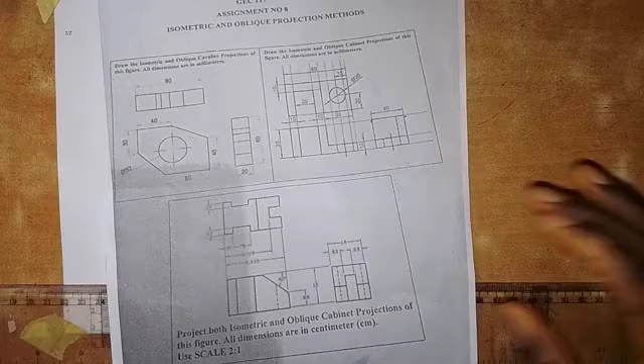Now here we want to work on this particular drawing, and we have to produce its isometric view. As I've said, we have worked on this. We want to produce the isometric view of this, and let's see how we are going to do this.

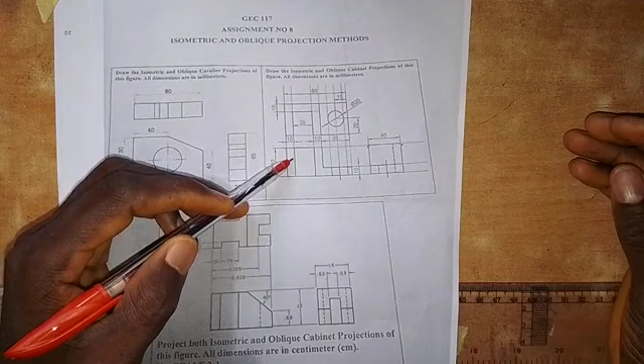So first of all, let's talk about how the views are placed. So this is the front elevation, this is the plan, and this is the end elevation. So it means the views are given in third angle projection. And let's talk about the dimensions.

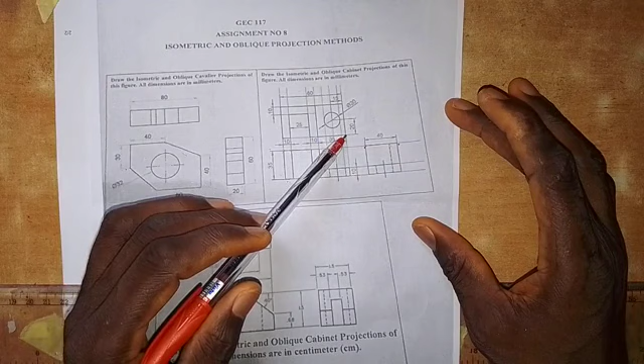So the distance from here to here, that's the height of the front elevation, is 35, and then this is 10 from here to here as we are given in the plan. So from here to here is 10, distance from here to here is 35, and then the thickness from here to here is 10, and then we also have that the distance from this point to the center of the circle is 20. Then distance from here to the center of the circle is 15.

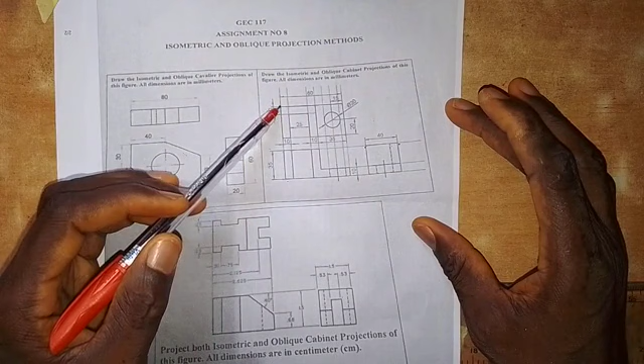The diameter of the circle is 20, and then total length of the plan is 80 millimeters. Thickness from here to here is 10, and then distance from here to here is 25, and the width of the front elevation is 40 millimeters as given in the end elevation here. So we are going to work on this and get the isometric view of this object drawn.

So the first thing that we are going to do here is to draw a horizontal line. So we draw a horizontal line like this, and then we take our 30-degree set square. So we draw a line in this direction like this, and then we turn like this. So we draw a line in this direction.

So at this point, I'm going to draw a short vertical line. Yes, a short vertical line at this point. So I will take a measurement of 10 millimeters. So just follow me the way I'm going to bring out the isometric view. So I will draw this line in this direction. Okay, then I'm going to draw this line in this direction like this.

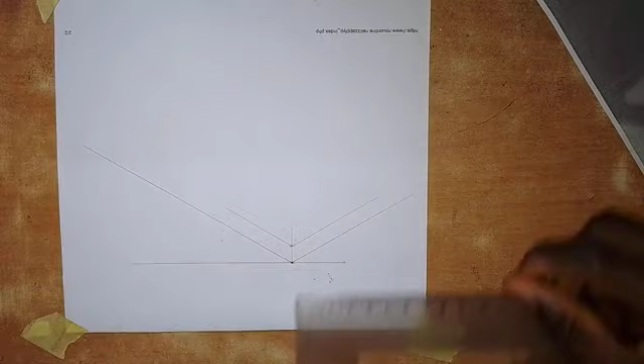Okay, so for the width, I will take 40 millimeters as we are given the dimension of the width in the end elevation. I will take 40 millimeters to this side. So at this point, I will draw a vertical line like this, and then coming here also, I will draw a line from here, backward. Okay, so I'll draw a line from here so it goes to the end.

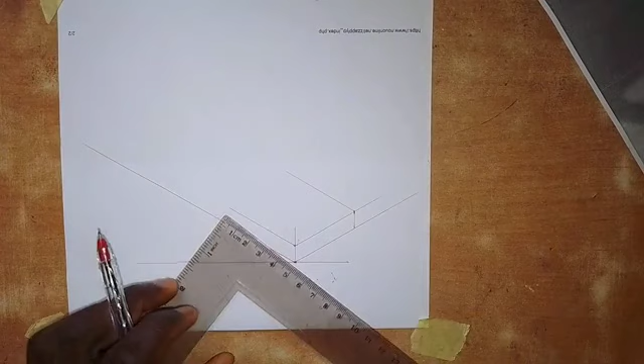So here on this part, I will take 35 millimeters. So this is 35 millimeters. So I will transfer this line to the other side here like this. Okay, so at this point, I will erect a vertical line. Okay, so at this point also I will erect a vertical line. So I want this vertical line to come down to this point.

Okay, so here I'm going to take 35 millimeters, which is the height of the front elevation. 35 millimeters from here up. So this is 35 millimeters here. So I'm going to transfer this point to the other side on the other line. So it goes like this. Okay, so from this point, I'm going to draw a line in this direction.

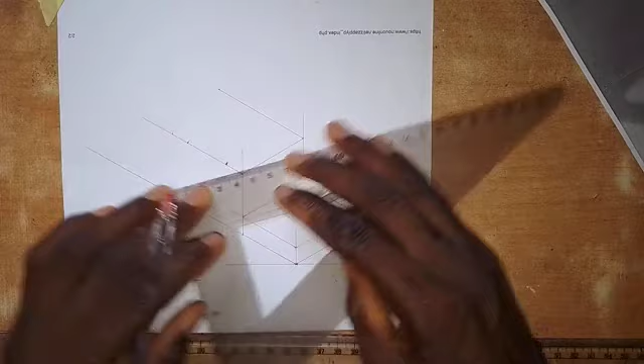So coming to this point, I will draw a line in this direction, and then I'm going to take a measurement of 10 millimeters. So from here to this point, this is 10. Then I will take 25 from here. So this is 25, and then I will take 10 from here to here. So then here on this part, I will take 10 millimeters. So this is 10 millimeters.

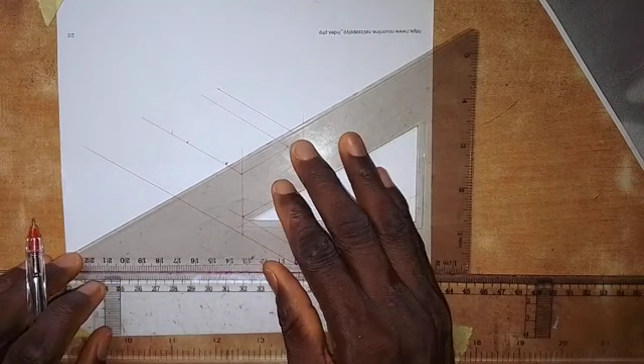So I'm going to draw this line. So I draw a line from here, and it goes backward like this. Okay, then from this point here, I will draw a line to meet this line. So also at this point, I will draw a line to meet this line. Then at this point, I will draw a line so it goes and meets this.

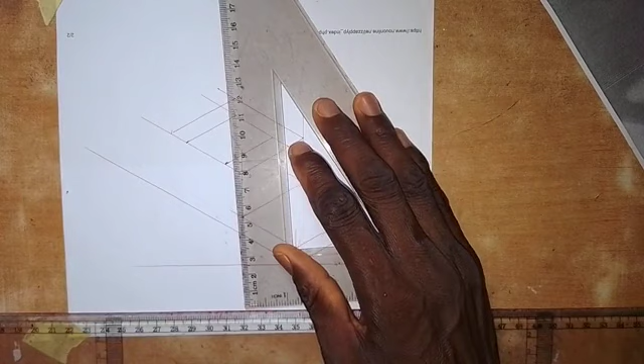So then at this point, I'm going to draw a vertical line. So here I will draw a vertical line down.

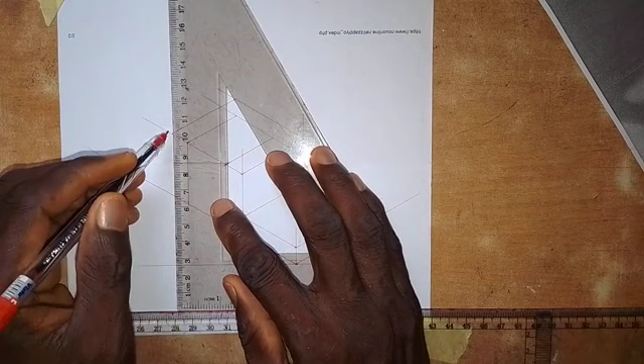So here I will draw a vertical line down here. So here also I will draw a vertical line down. So at this point also I will draw a vertical line down like this. So coming to this point here, I need to draw a vertical line. Okay, so I will draw a vertical line here, and then at this point here, I'm going to draw a line in this direction.

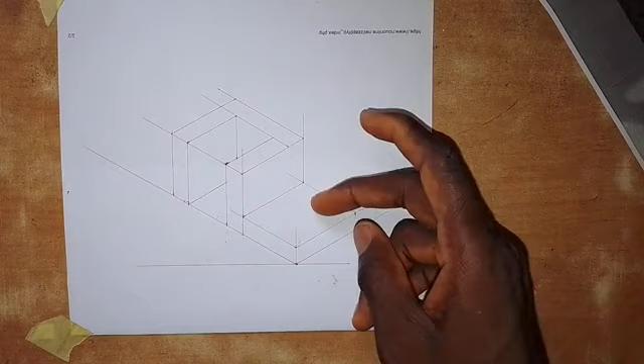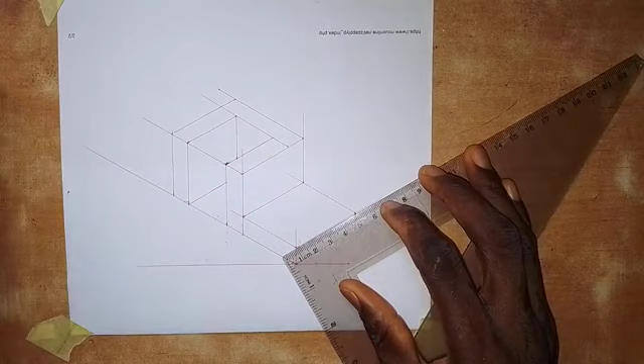So apart from the hole that we have here, the work is already done. So let's produce the hole before I bring out the thickness. We only need to put the hole. Every other thing that we need is already there. So for the hole, it is placed in the middle here. So I need to take a measurement of 20 millimeters here, and I need to take 15 millimeters, so this is 15. That's to get the center of the hole.

So I will draw this line, a center line in this direction, and then here I will draw a line as a center line in this direction. Alright, so the diameter of the circle is 20, which means I need to take 10 millimeters from this point. So 10 millimeters here. So here I take 10 millimeters. And then coming here, I take 10 millimeters to this side from the center and 10 millimeters to this side.

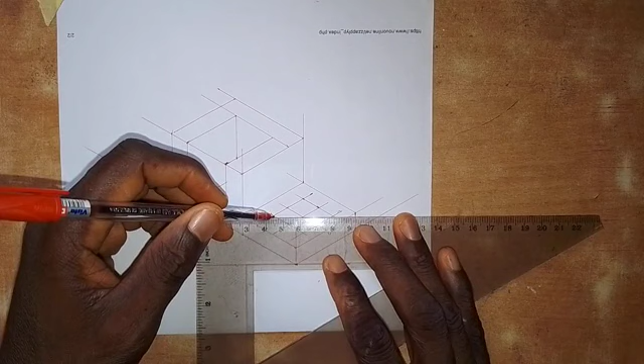So then I will create an isometric square on this surface. So this is it. Okay. Alright, so then we join the longest corners together. Join the longest corners together like this. Okay, so then this point I will connect together. This I will also connect together with this point.

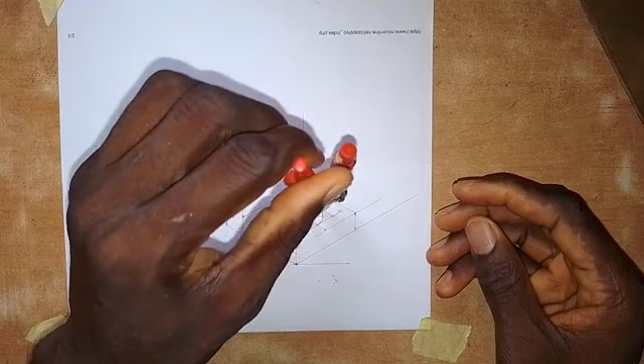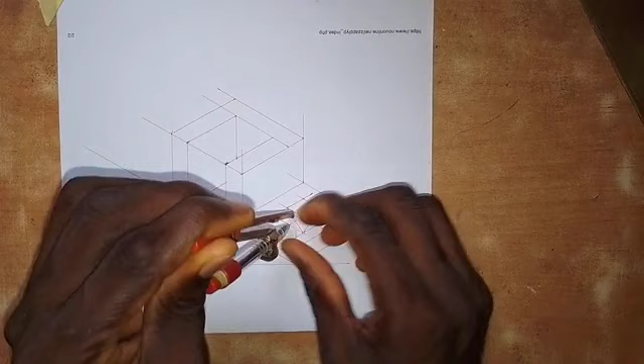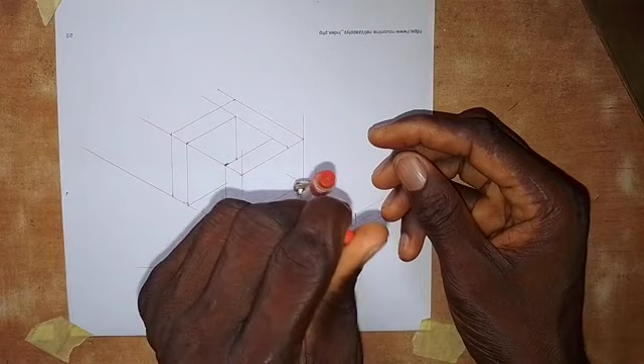Okay, will my compass work? I just want to look at it. Okay, I think it will work. Let me try it, because looking at this, it's as if it's small. Alright, so it goes. Then I will put it at this point. At this point. Alright, so then put at this point. As I said, for you to be able to draw an isometric circle with the use of a compass, you need to have a very strong compass, and then you need to do it gently. So I put at this point, and okay.

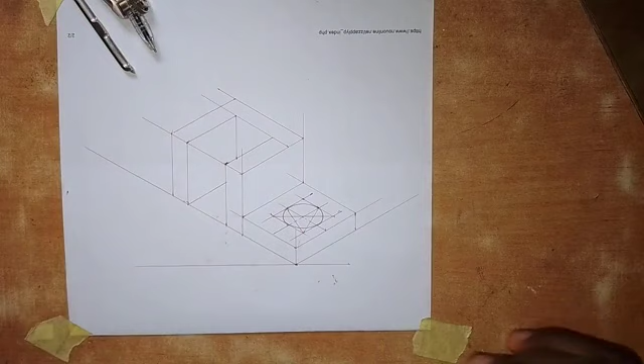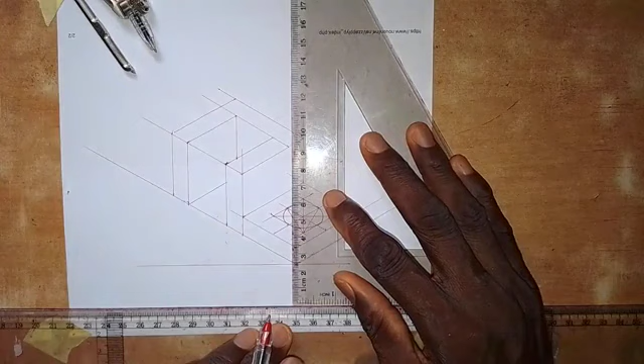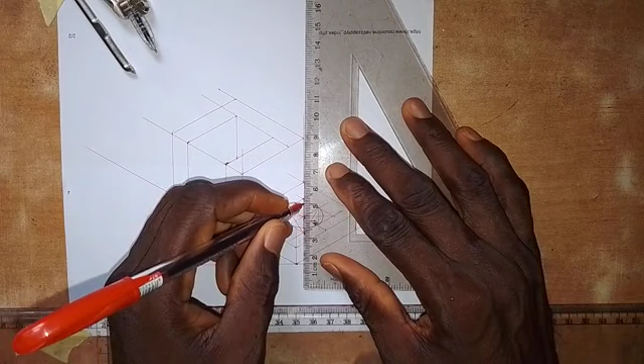Alright, so because of the thickness that we have here, we need to try as much as possible to make sure that the lower part of this hole can be seen. So to get that done, from this point here you draw a vertical line down, and then I'll come to this part and draw a vertical line. Coming here also I will draw a vertical line. So from this point on the circle itself, take 10 millimeters down on the isometric circle. So this is what we are going to use.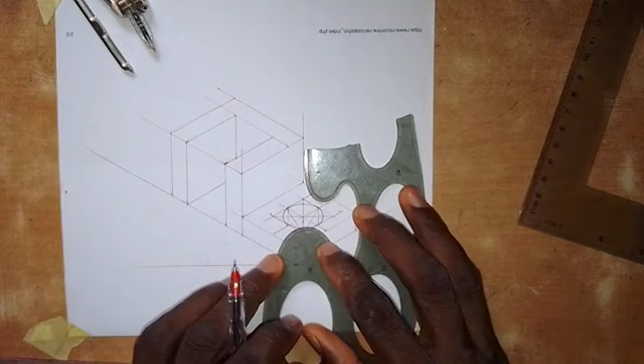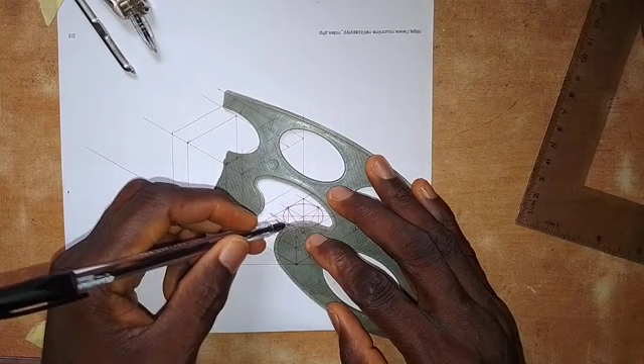So in this case, I will use my French curve to do that. So bringing it like this. Okay, and I need to use this point. Okay, so this is where we have it. So this is the lower part of the circle because of the thickness that we have here. So we need to produce that. I believe you saw how I got that done.

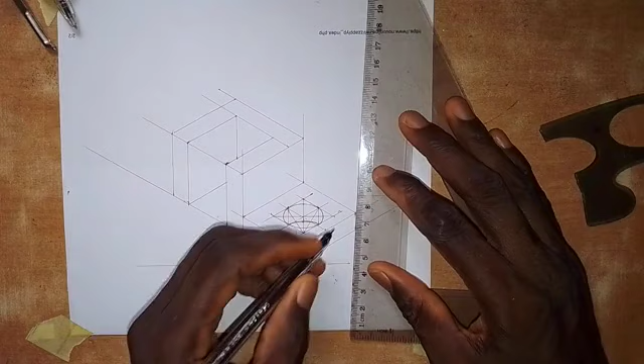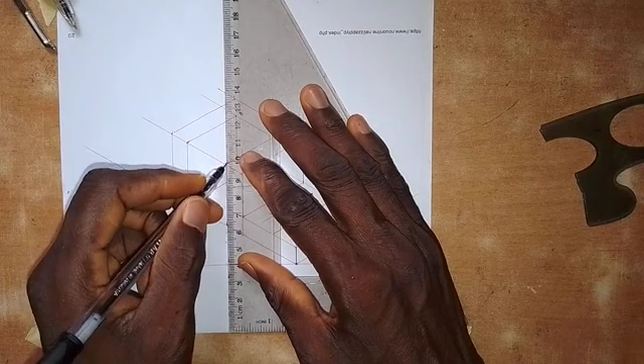So what we need to do now is to bring out the thickness of this object. To bring out the thickness, as you can see me doing it here now, I'm going to pause the video and I will bring out the thickness so that you can see it. Okay. This is the work. All you need to do is to practice. When you practice it, you surely master.